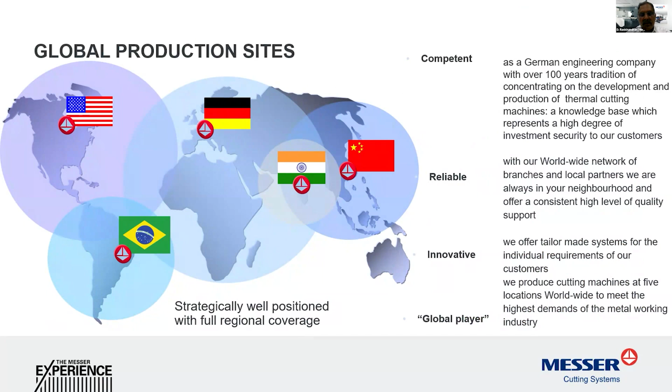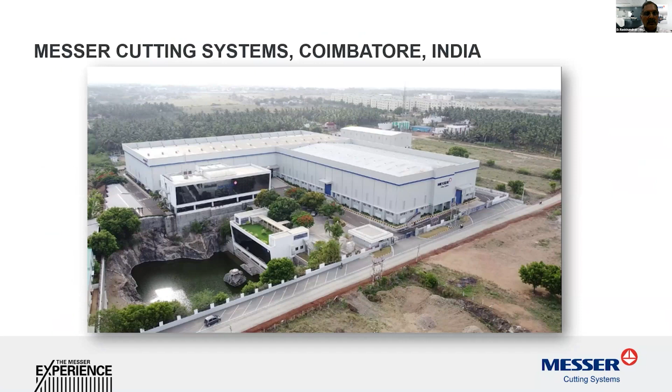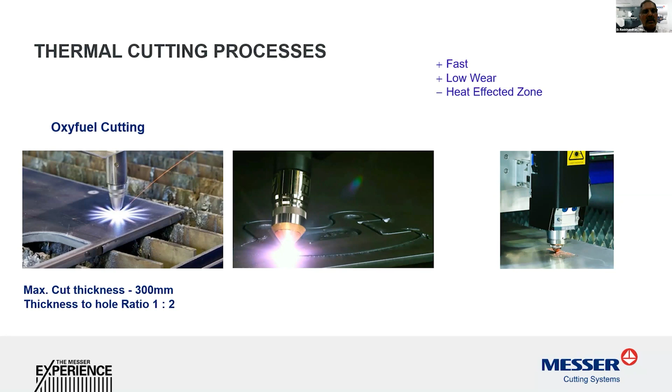I'm going to talk about automation and material handling in the plate cutting industry. The plate cutting industry is basically made of 3 thermal cutting processes: oxyfuel, plasma, and laser. The market capacity is somewhere around 4,000 machines per year in India itself. It's a highly labor-oriented market, where you have to store the material, take it out, fit it onto the machine, and after cutting, pick up the cut parts again. These are the 3 types of cutting processes where plates are used.

Now, if you really look at the need for automation, every manufacturer or OEM supplying cutting machines, or any industry for that matter, has started making high-productive machines, because it's not just about producing, but producing with high productivity and high profit. So ultimately all the OEMs are making high-productive machines, and the user is always looking at lean manufacturing with very few people and high productivity. And when you say fewer people, lean is not just about manpower, it's also about the manufacturing process.

They don't want to produce in bulk or have a large batch quantity - making only 50 parts of this, then shifting to the next part. It's about shifting for the demand, so even a small batch quantity needs production to shift, and that has to happen at a very fast pace. The changeover should happen quickly, limiting idle time while switching between processes or material types, and the whole process should be automated. While being lean, the ultimate goal is a very short lead time between order and supply - demand and supply within as minimal a lead time as possible.

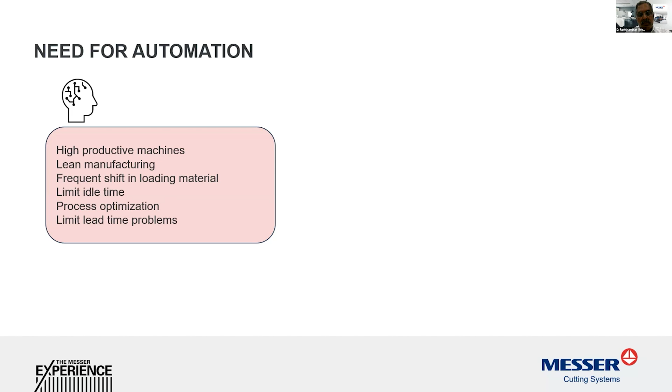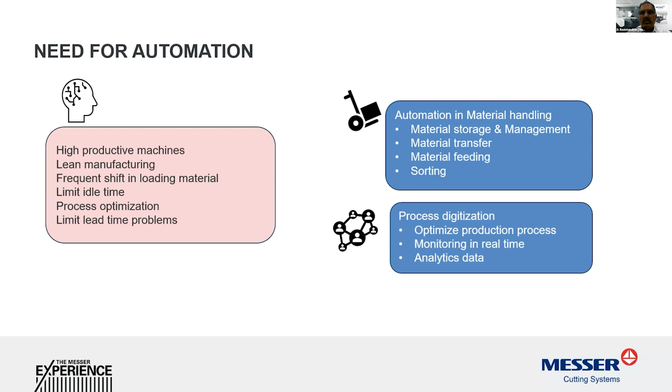This is possible in two aspects. One is automation and material handling in the system, and also digitizing the process, wherein you are eliminating all manual intervention and streamlining or digitizing the workflow of the process - that also helps in the manufacturing process.

So ultimately, what are the benefits of automation? You have increased productivity, and when you have increased productivity, your operating cost goes down. Then, when you have automation, all the repetitive jobs or tough jobs are automated, which gives safety to the operator.

And the work environment also improves because the tough or repeated jobs are taken off by machines, and man is able to do only the creative jobs. And since automation is there, you'll be working on a very small space, so you'll have better use of the available floor space.

Combined with this, your planning will improve, or you'll be forced to improve your planning, and then your quality of product also will go high. So these are some of the benefits of automation.

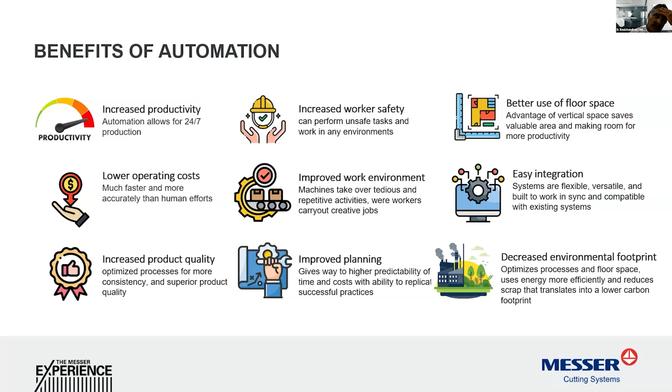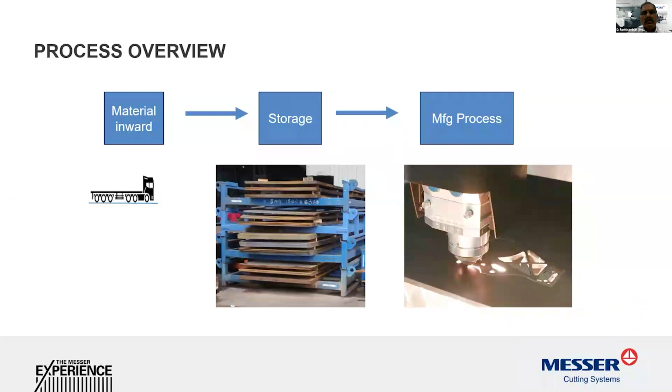So let's go into depth on where all automation can be used. If you have an overview of the fabrication industry, material flows in, it's being stored, and the manufacturing process happens. You have a lot of equipment used to handle the material and also man, from storage to the cutting area, and then feeding onto the machine.

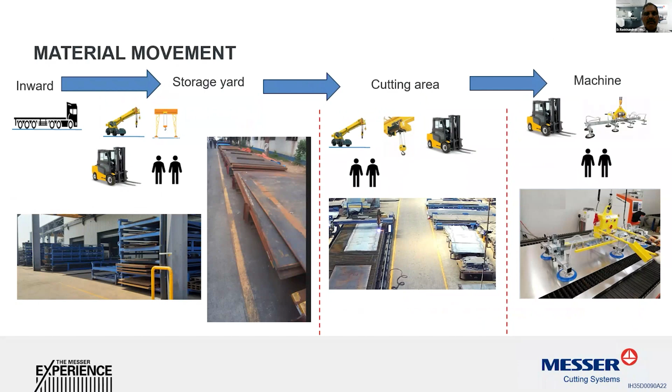I'm just moving fast because I feel everybody needs more time. So when you store in a store yard, if you don't have a defined way of storing or automation, these are the things which happen.

Like in an emergency, it's loaded onto the floor, or different thicknesses are stacked together. So when you want a plate which is underneath, you've got to remove all the top plates and then take the bottom plate. What happens is you end up wasting time and manpower, which ultimately amounts to loss and increasing process cost - reduction in profit and increase in process cost.

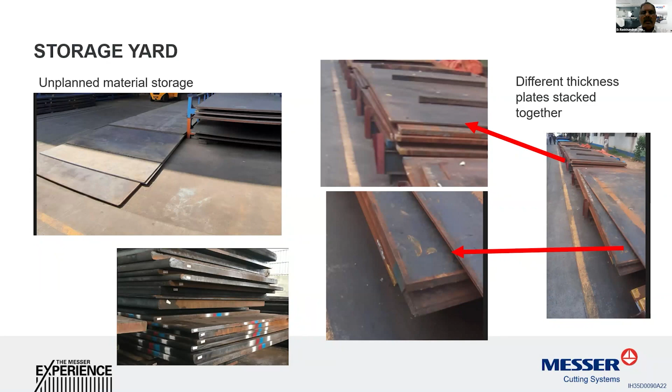If it is done in a well-defined manner, that will not happen. Also on the cutting area, you can see a lot of space being utilized for placing the material. This should be avoided.

When you don't have a proper automation system or loading system, you see on the left a big plate being loaded - but what is the safety of the man? Just that plate swings off, then he loses his leg or falls down and an accident happens. And even for a small plate, you need more labor to feed it onto the machine.

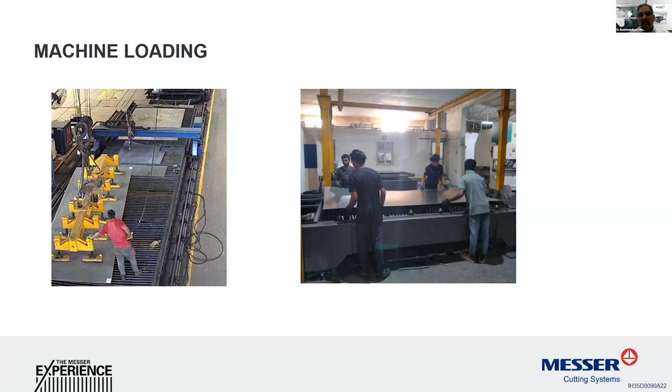These are actually pictures taken on the workplace without the workers knowing it. So you can imagine how much labor is used, along with safety risks and excess manpower.

The challenges are: if you do it manually, you will have inconsistent tracking without a proper storage system, limited inventory visibility. You will think you have only so much, but you will have hidden inventory elsewhere also, and you will not be able to manage space well.

As the business grows, the space constraints also grow. And if you don't have automation, your dependency on manpower also goes up - and all this affects your output and your business.

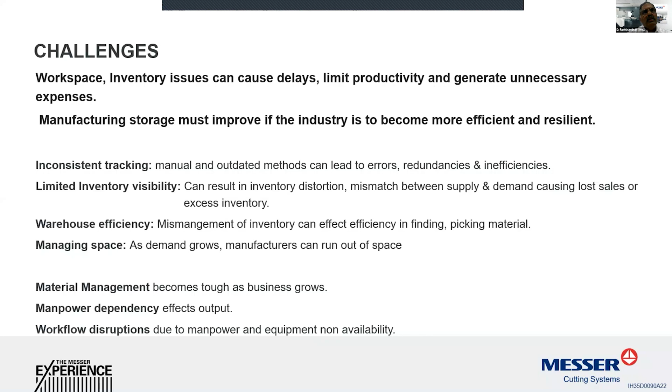I will show you a few examples of how materials can be stored, handled, and fed to the machines.

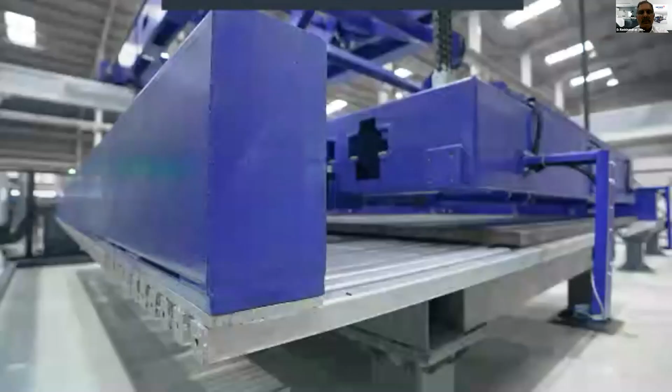I don't want to take more time with this video. So, for handling of plates - plates can be stored vertically, which can ease out the usage of floor space.

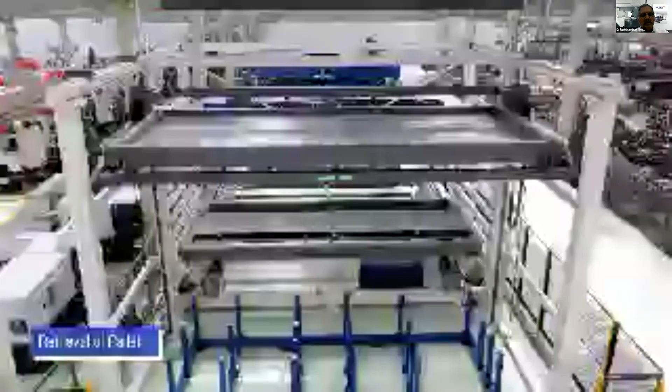So the plates can be stored using a forklift and moved onto a vertical tower. I'm just showing an example with one pallet with a plate. After that, the plate can be moved and fed to the machine by retrieving the pallet and taking it to the other side of the vertical tower, where you have vacuum pads which take up the material and load it onto the machine.

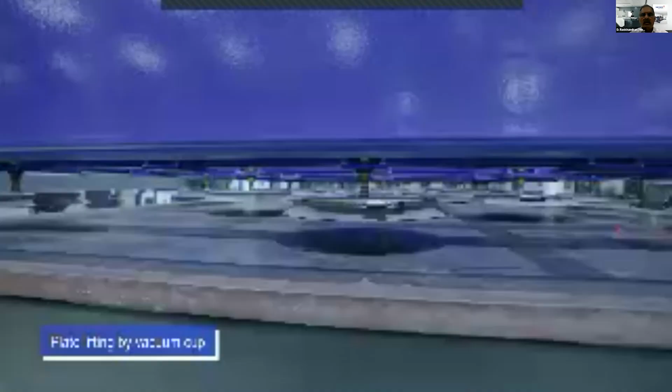So this is a live example I'm trying to show you. This is a very typical case, handling of a 5-ton plate.

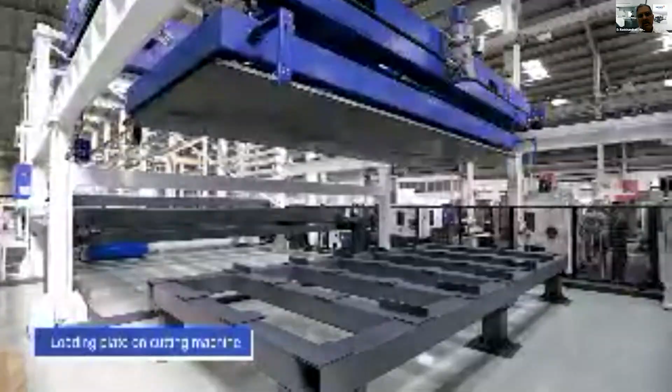So no manpower needed, well-defined process. I'm just simulating this - what you can say is the stand, if you replace the stand with a machine which is going to cut. So this is how the plates can be handled. After the plate is cut, all the cut parts can be removed, scooped up and removed.

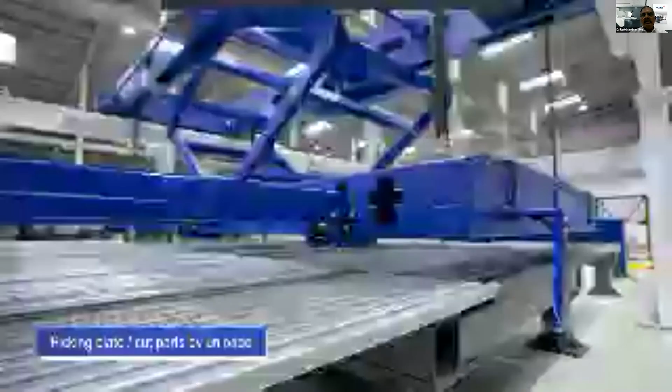So I'll skip this for now. You have the machines and you can load the plates directly onto the machine. But if you have an automation system, you can store the plates onto a storage tower, a cart, or a platform. From there, vacuum lifters pick up the material and load it onto the machine, and all this is automated so that your inventory is 100% accurate.

It is live, I would say. When you remove a plate from here, the inventory goes down, and when parts are cut, the inventory of parts goes up. So these systems can be used as a combination of storage systems on the left hand side, and delivery systems on the right hand side.

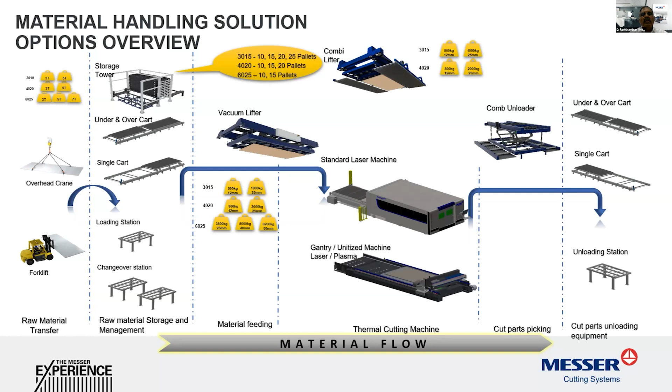The plates can be taken up by a vacuum lifter, or in some cases magnetic lifters, and the unloading of cut parts can happen by comb fingers. There are many options where you can have a loading unit and separate unloading unit, or a combined loading and unloading unit, and then you can have a tower system.

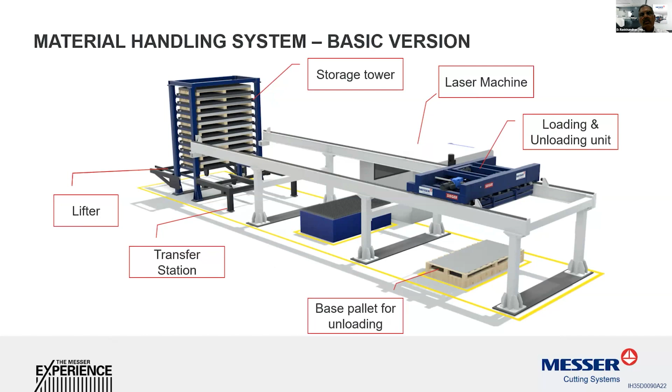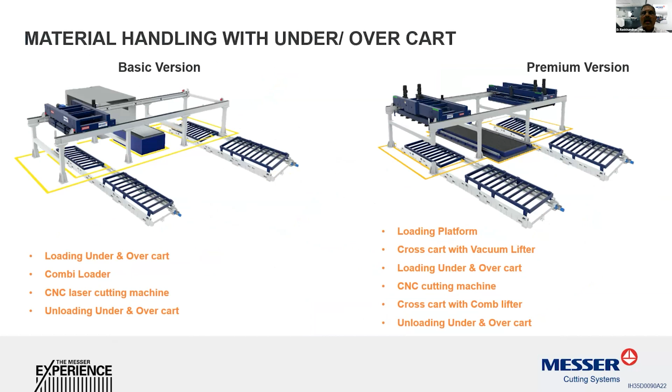You can have just 2 pallets, or 2 carts which can go in and out, based on your layout, space availability, and how much you want to automate the process.

This is another compact system, which you can have for each individual machine separately, so that you don't have to rely on manpower. You would have seen a picture where 4 people are feeding a plate onto the machine. So here...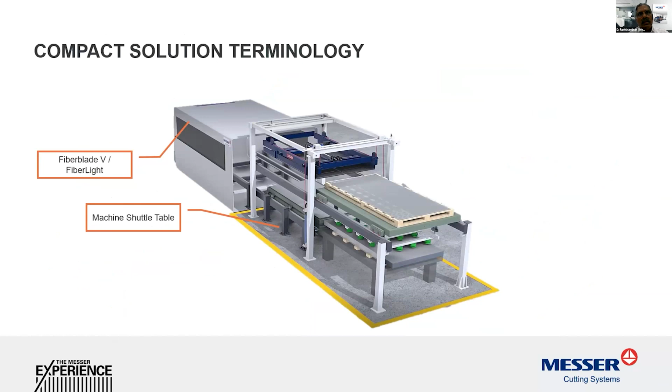This video I will just show you, I'll run it for 1 minute.

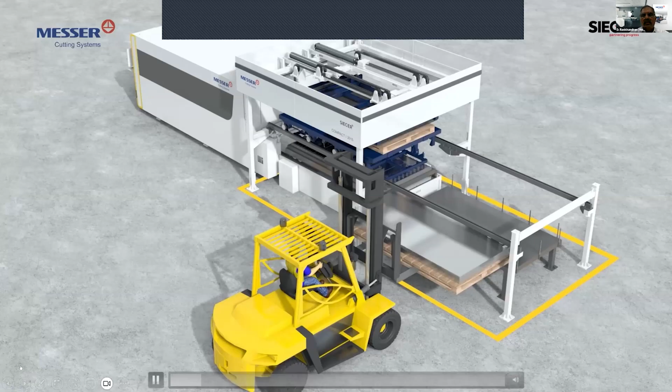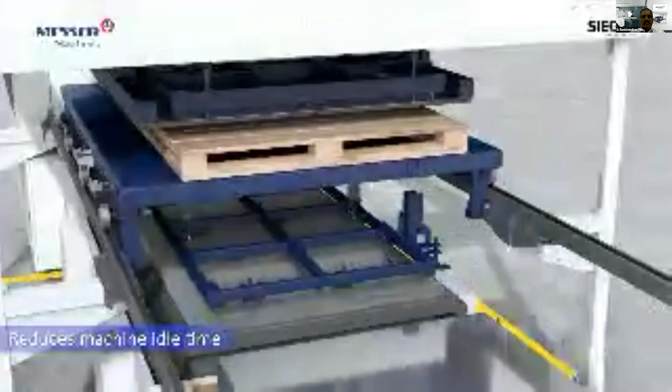Messer Cutting Systems India Private Limited solution for standard fiber laser machines. Compact automated material handling system ensures machines are fully utilized, contributing to reduced cost per part and faster return on investment. Automation is an effective solution to reduce machine and manpower requirements. Messer Compact solution is reliable and stable to maximize productivity, reduces machine idle time between sheets, improves work environment and safety, improves workflow through the factory, eliminates manual loading and unloading, with low maintenance.

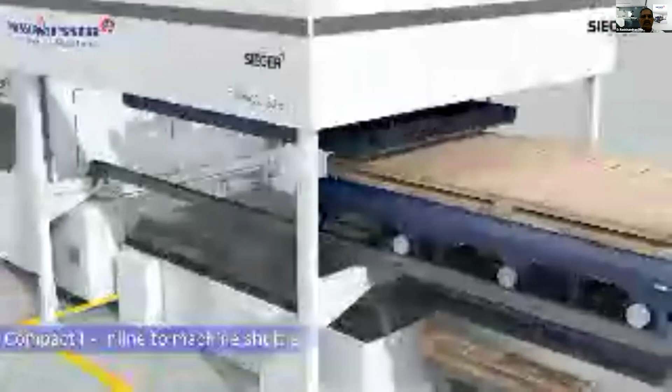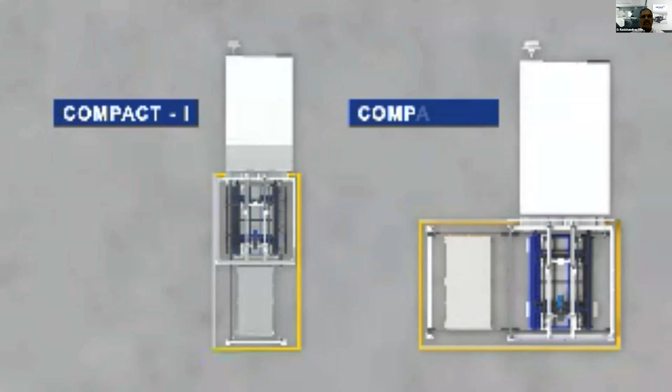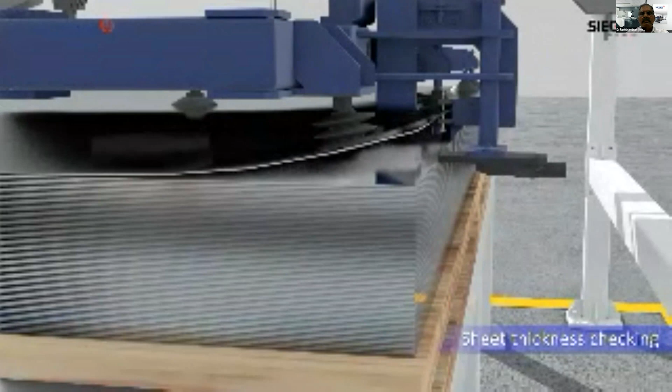Compact solution comes in 2 variants: Compact I, material feeding system inline to machine shuttle; Compact T, material feeding system perpendicular or parallel to shuttle. Compact I and Compact T solutions have a small footprint requiring minimum floor space. Sheet thickness checking for thinner sheets avoids multiple sheet loading. Symmetrical design of Compact T enables material feeding from either side of the shuttle table.

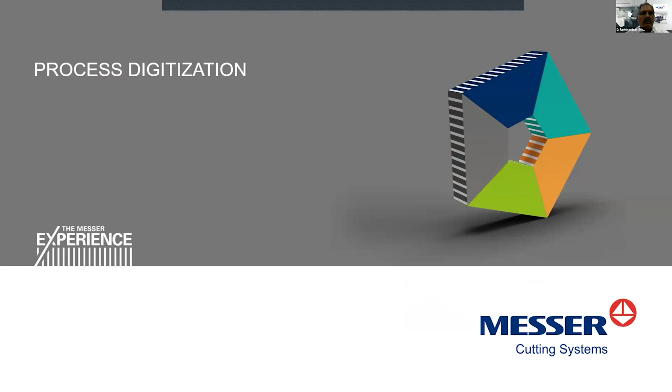And for combined machines, we have done 4 machines with one automation system - some pictures of that. It's always better to automate or digitize your workflow system also, which will improve your productivity.